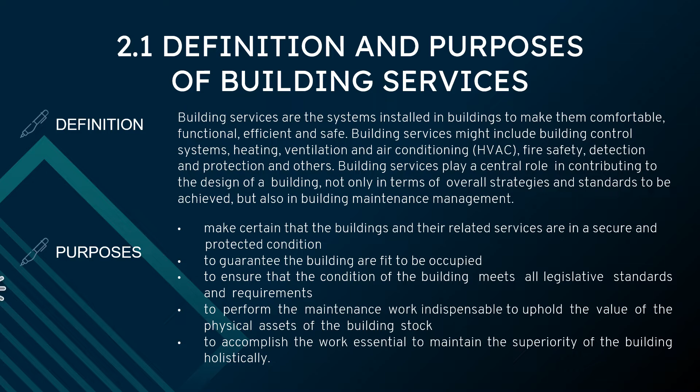2.2 The important factors building services need to be maintained. The first one is based on law. The law is in place to protect the health and safety of employees in the workplace. Damaged, poorly maintained buildings and premises can increase the risk of an individual getting injured due to damage to the building.

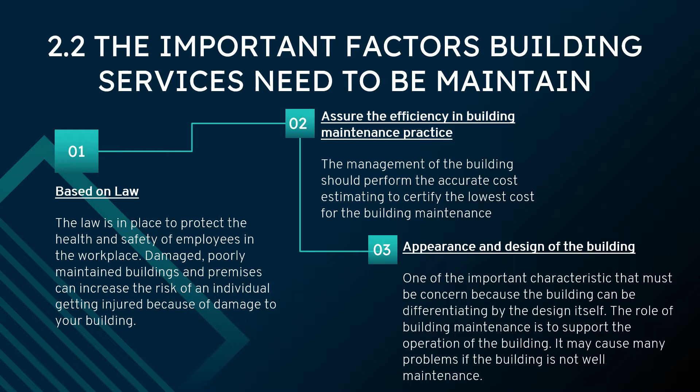The second one is assuring efficiency in building maintenance practice. The management of the building should perform accurate cost estimating to certify the lowest cost for building maintenance. The third one is appearance and design of the building, one of the important characteristics that must be considered because a building can be differentiated by its design. The role of building maintenance is to support the operation of the building. It may cause many problems if the building is not well maintained.

2.3 The roles and responsibilities in building services maintenance work. Number 1 is maintenance manager: train and supervise employees of the maintenance department, implement workplace safety policies and standards. Number 2, maintenance worker: performing preventive maintenance, handling basic repairs and maintenance, and diagnosing mechanical issues and correcting them.

Number 3, building service manager. The roles and responsibilities are to supervise and coordinate activities of maintenance staff engaged, monitor conditions of buildings, and develop schedules for routine maintenance.

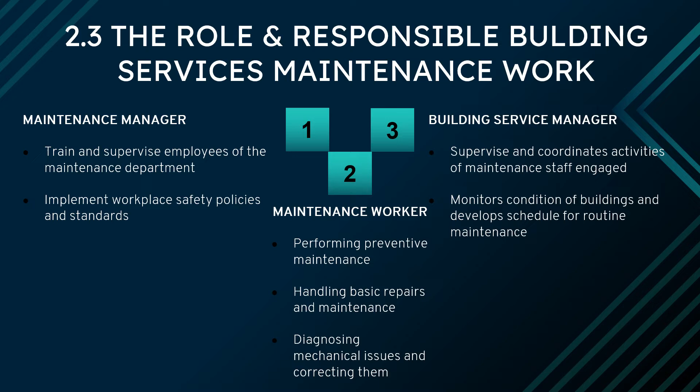2.4 is the types of building services. Examples of hard building services are firefighting system, water supply system, electric distribution system, sanitary fittings, domestic waste disposal system, mechanical ventilation system, mechanical transportation system, telecommunication system, uninterruptible power system, generator set system, security system, CCTV system, gas supply system, and sewerage system.

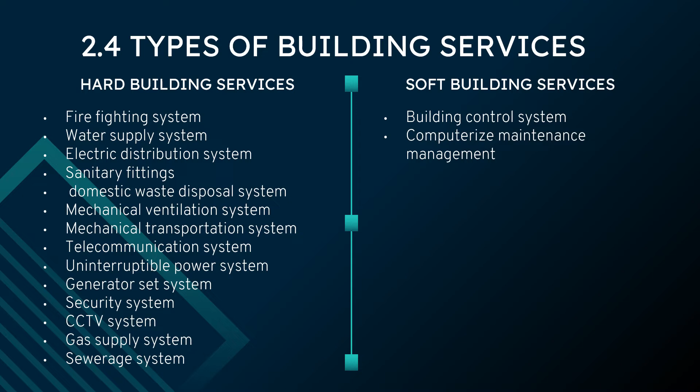For soft building services, there are only two: number one, building control system, and computerized maintenance management. For topic 2.5, types of hard building services, number one is firefighting system. There are only two types: active fire system, and passive firefighting system.

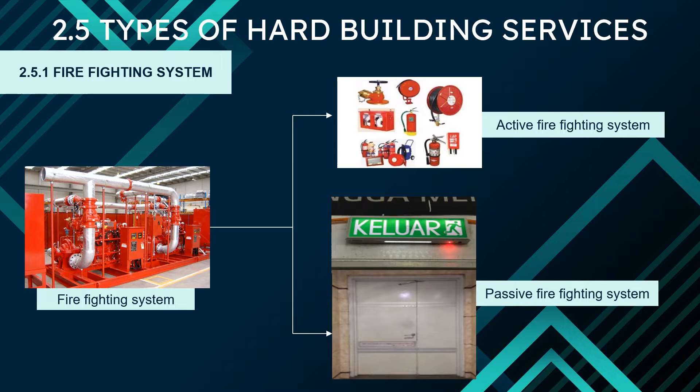Next chapter, 2.5.2, building water supply system. For this building, Wisma Sumber Asli, the water supplier is Syabas. From the supplier, the water goes to the piping distribution system, next to the water tank system, and completes the cycle at the water pump system.

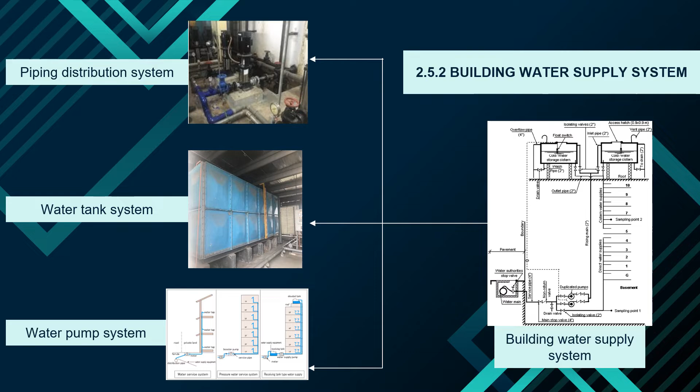Chapter 2.5.3, electrical distribution system. This is the building electrical distribution system for Wisma Sumber Asli, from the electrical substation system, which includes generation, transmission, sub-transmission, to the electrical wiring system in the building.

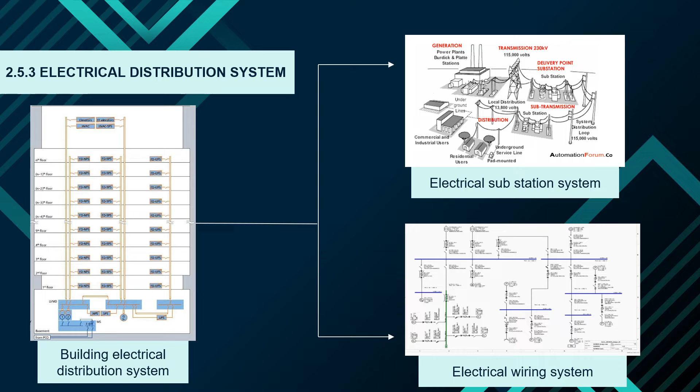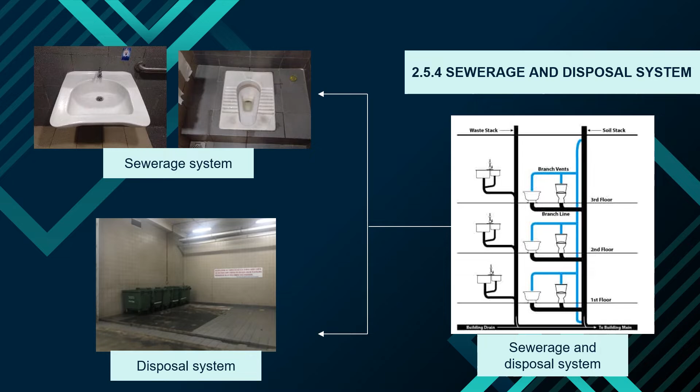Next we go to chapter 2.5.4, which is sewerage and disposal system. This is an example of the sewerage system included in Wisma Sumber Asli. The sewerage system is the toilet, and the disposal system is the garbage house at level 2 of the building.

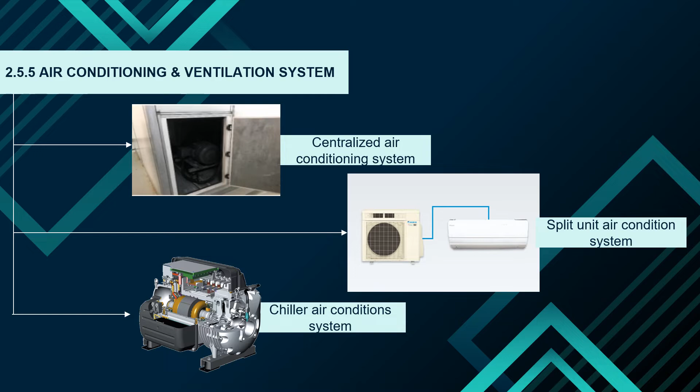Chapter 2.5.5, air conditioning and ventilation system. For this building, there is a fully air conditioning system, which uses the centralized air conditioning system, split unit air conditioning system, and chiller air conditioning system.

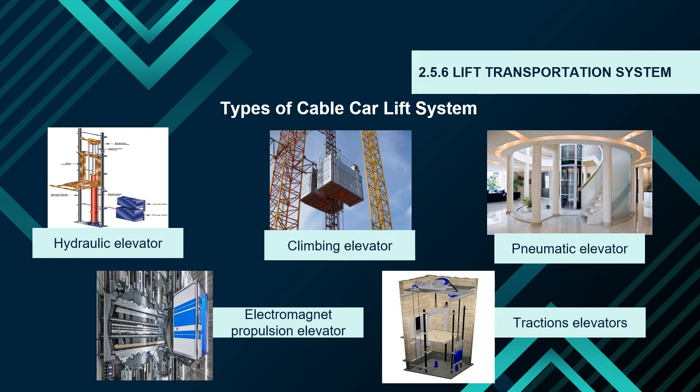2.5.6, lift transportation system. This is the motor room mechanical system, which includes electrical disconnect, machine brake, motor generator set, and the encoder.

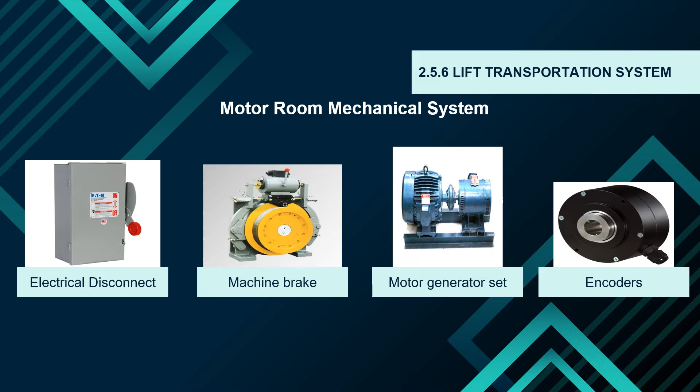Lift transportation system. There are four types of lift control systems, such as manually controlled elevator, dual operation elevator, automatic control elevator, and signal operation elevator.

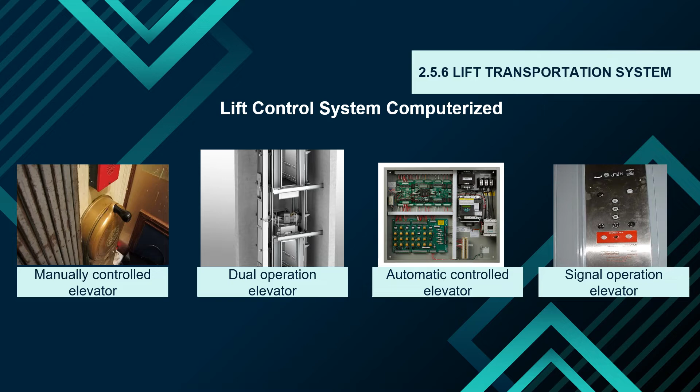Lighting system. There are three types of lighting system, such as occupancy sensor, time clock, and photoresistor.

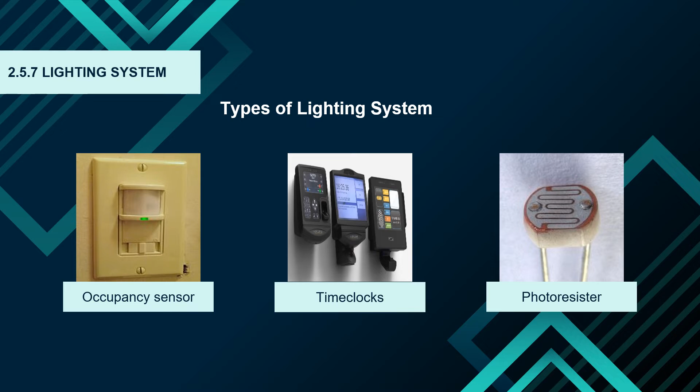Lighting system. Inventory lighting system based on building space. There are two types of the lighting system, such as solar time and daylight availability.

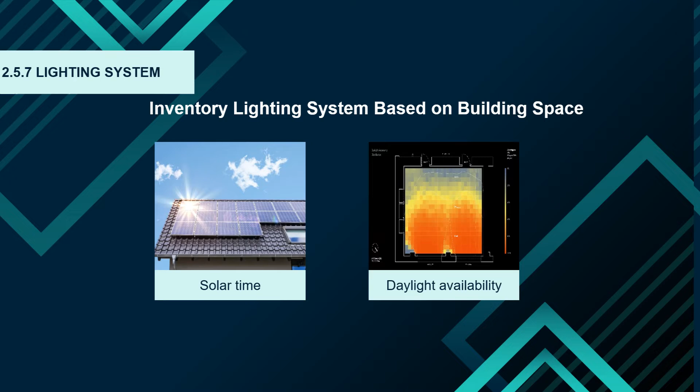Telecommunication system. There are three types of telephone system usually used in buildings, such as traditional PBX, VoIP PBX, and hosted VoIP phone system.

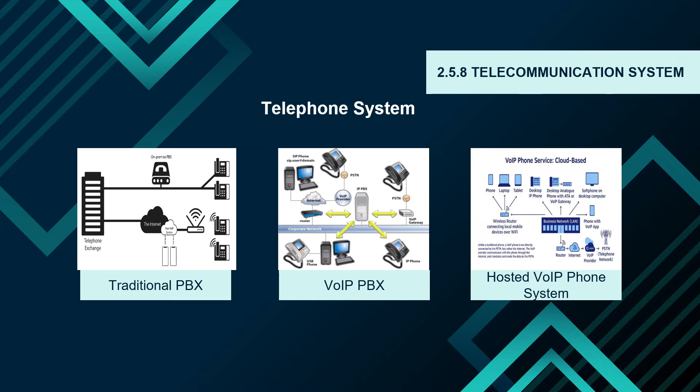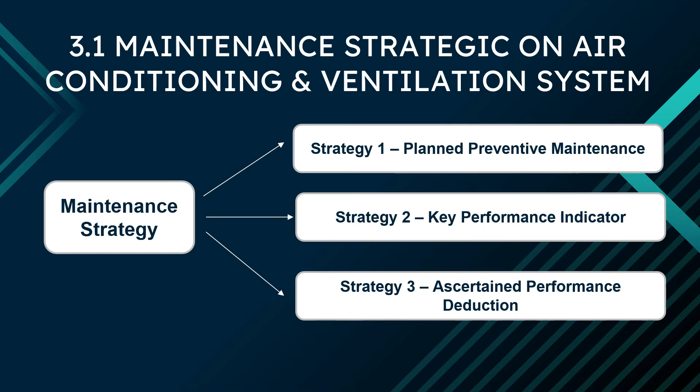Strategy 1 is planned preventive maintenance. Preventive maintenance refers to regular, routine maintenance to help keep equipment up and running, preventing any unplanned downtime and expensive costs from unanticipated equipment failure. It requires careful planning and scheduling of maintenance on equipment before there is an actual problem, as well as keeping accurate records of past inspection and servicing reports.

Strategy 2 is Key Performance Indicator. Key Performance Indicators (KPI) are those performance indicators that measure the critical success factors which affect a desired outcome. Maintenance performance indicators reflect achievement and progress in meeting an agreed maintenance benchmark.

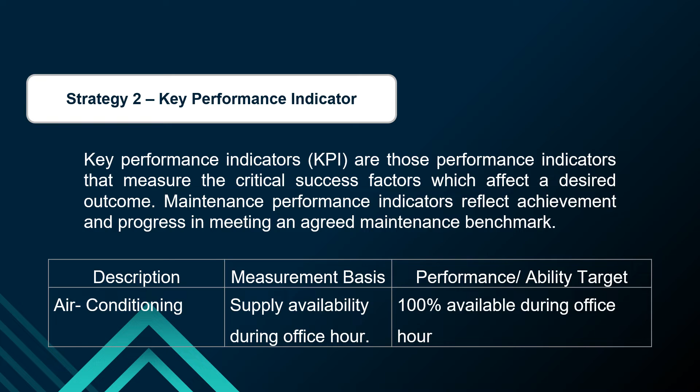This is the table of air conditioning description. The last strategy is ascertained performance deduction.

APD is a concept where penalties are given to the contractor if the contractor makes faults during work. The APD system is based on a demerit point system. The table below shows an example of the demerit point system for air conditioning.

The measurement basis is on supply availability during office hours. The availability target is 100% available during office hours. The component value is RM 20,570.80. RM per parameter unit is RM 97.96.

The demerit point is 1.1655, and the deduction in RM is RM 114.17.

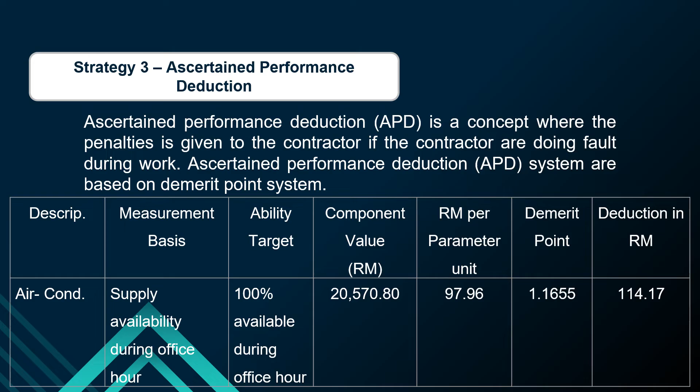Next is maintenance planning on air conditioning and ventilation system. Building maintenance is divided into two types: planned maintenance and unplanned maintenance. For planned maintenance, there are two types: preventive and corrective maintenance. For preventive maintenance, there are scheduled maintenance and condition-based maintenance.

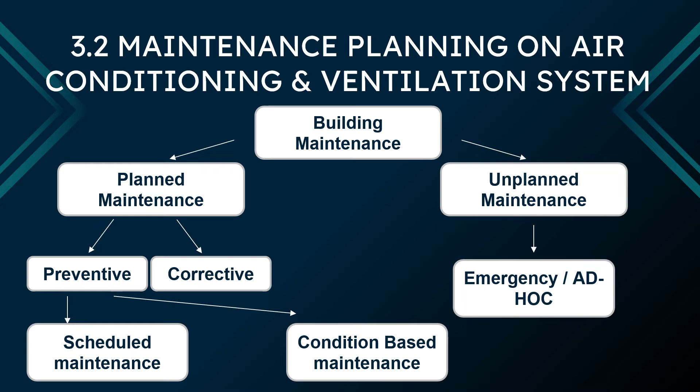For unplanned maintenance, it's for emergency or ad hoc situations. Gumi Asli Electrical uses all types of planning, but they focus more on planned preventive maintenance to maintain the Wisma Sumber Asli building.

Planned preventive maintenance is designed to prevent equipment from breaking down. Taking active steps to keep the equipment in good condition is usually more efficient than repairing or replacing equipment after it breaks or fails. 3.3 Maintenance Program on Air Conditioning and Ventilation System.

For Wisma Sumber Asli, the building is using a medium-term maintenance, also known as annual programs. The objective of annual programming is to provide an accurate assessment of the amount of work to be carried out during the forthcoming year and to form a basis for the financial budget. The table below shows the maintenance frequency held in the building.

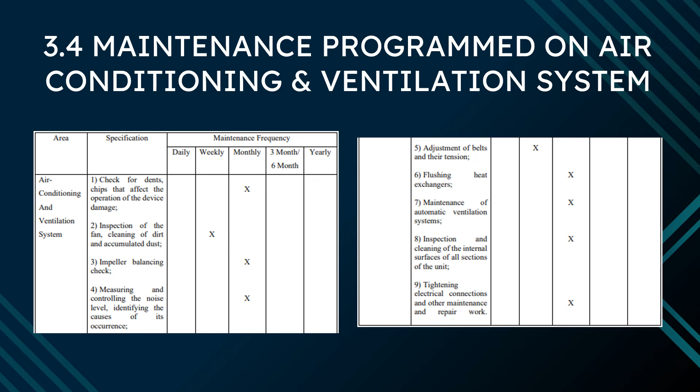For example, number 1, check for dents or chips that affect the operation of the device. This maintenance work is done monthly. For number 2, inspection of the fan and cleaning of dirt and accumulated dust is done weekly. From this table, we can see that most maintenance work is done monthly rather than weekly, so they can maintain their equipment in good condition.

There are two issues that occur in building maintenance management. The first is that the maintenance team only checks the air conditioner if problems occur, focusing only on the problems they see. Problems like clogged filters, improper air balance, frozen evaporator coils, and more should be given more attention, as they could lead to more serious issues such as less cold air output and very slow air flow.

The second issue is that the maintenance department does not provide a long-term strategy and schedule for inspecting the air conditioner system. To maintain and protect any building asset, it is essential that an effective maintenance plan is produced that not only ensures the building's value is maintained, but also ensures the quality of the internal living environment is sustained.

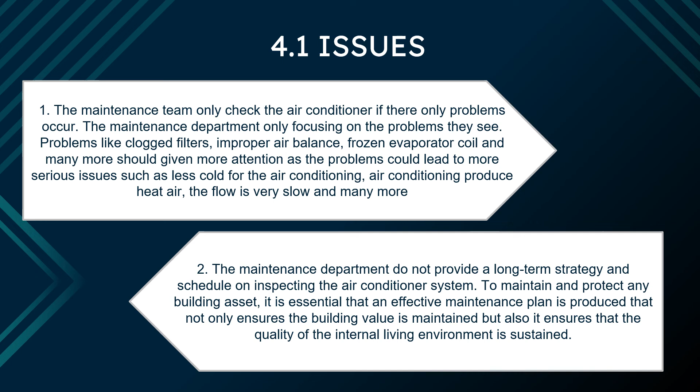For the recommendation, the management team must focus more on air conditioning internal problems than external problems. By doing that, it can extend the life of the air conditioner. A well-maintained air conditioner will give many benefits in terms of time, money, and manpower. What we mean by time is that by maintaining the air conditioner regularly, less time is needed in the future to repair and fix problems that occur in the system.

In terms of money, no extra money is required to repair severe and major damage. This is because when we do regular maintenance, we can ensure that no serious issues or problems will happen in the future. While for manpower, when there is less repairing work to do, the manpower needed also becomes less.

The maintenance management must also provide a long-term maintenance schedule for the air conditioning. There are many benefits to doing a long-term schedule. It can eliminate the element of surprise cost for buildings and informs owners and new purchasers what is coming up in the future. We will also be aware of any expenditures that may be coming up.

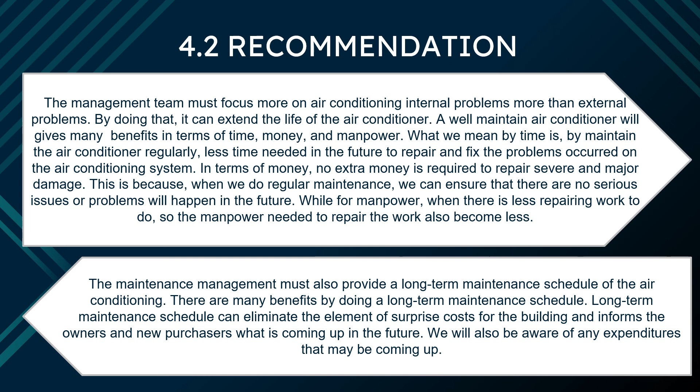In order to have a good functioning air conditioning system, it is important to carry out a regular air conditioner program. Preventive and long-term maintenance schedules adjust the air conditioner as well as reduce maintenance costs, while also increasing equipment life and reducing energy consumption. It is very important to point out external issues and problems in the air conditioning system that are addressed through preventive maintenance. It is recommended that a more complete preventive maintenance be carried out annually to guarantee an increase in the useful life of the product and the permanence of the guarantee.

During this maintenance, the removal of the equipment and the dismantling and cleaning of internal and external parts such as the heat exchanger, trays, fans, and other internal parts is important. Annual preventive maintenance is also essential for eliminating undesirable odors and preventing the propagation of fungi and bacteria, besides preventing the proliferation of harmful microorganisms harmful to the health of users.

For many obvious reasons, preventive aircon maintenance is important. Scheduling regular checks and tracking minor problem solving will help users enjoy all the comfort offered by the air conditioner without worrying that it will fail.